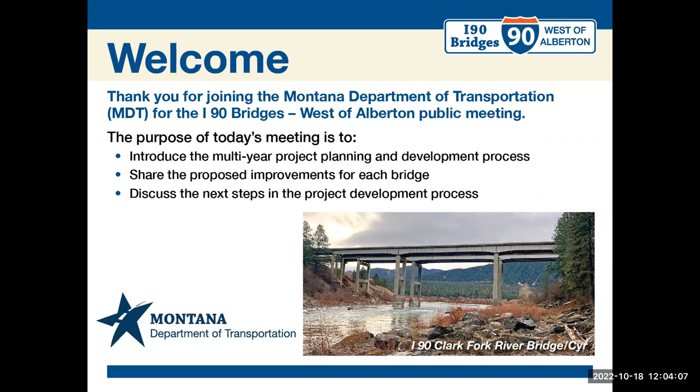At this time, I would like to turn over the microphone to the MDT District Bridge Engineer, Dwayne Wilson. Thank you, Brandon. My name is Dwayne Wilson, and I am responsible for managing the pre-construction activities for many bridge replacement and rehabilitation projects in the Missoula District. MDT's mission is to serve the public by providing a transportation system and services that emphasize quality, safety, cost effectiveness, economic vitality, and sensitivity to the environment.

MDT maintains a staff with the resources and technical expertise needed to perform the workload for the majority of the state transportation projects. When MDT does not have the resources or technical expertise in-house, MDT hires consultants for specific project work. Consultants are an extension of the MDT staff, capable of providing additional skills, experience, expertise, and quality work without increasing in-house staff. They are managed by the MDT consultant design engineer and work together with the MDT project team and management to deliver the project.

At this time, I'm going to ask each of the team members to unmute and introduce themselves, starting with Jason Sen. Hi, I'm Jason Sen. I work in the MDT Consultant Design Bureau, and I'm the project manager on this project. Next is Jim Scholes. Good afternoon, my name is Jim Scholes. I work at Morrison Maierle. I am the project manager on our behalf, and I'm also a bridge engineer.

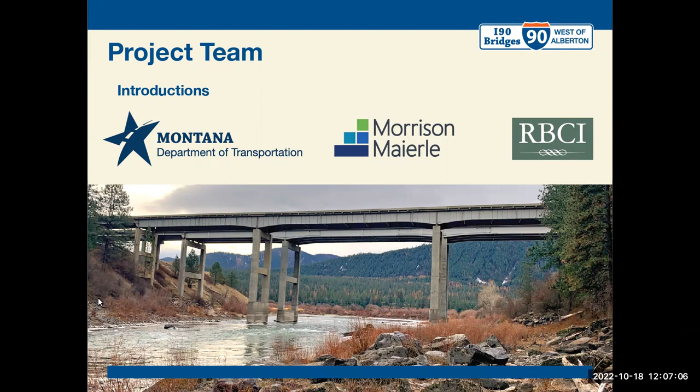The MDT Bridge Bureau is tasked with keeping Montana's bridges safe, resilient, economical, and reliable. The Bureau is organized into two sections: the bridge management section and the bridge design section.

MDT's bridge management section provides condition inspection and load rating evaluation for over 4,500 public bridges in the state. It also evaluates and analyzes overweight permit loads and performs bridge maintenance on state-owned bridges.

MDT's bridge design section provides design and engineering management on bridge replacement, rehabilitation, and preservation projects. It also establishes and maintains design criteria and standards, participates in research projects, and promotes design initiatives to improve bridge performance and value.

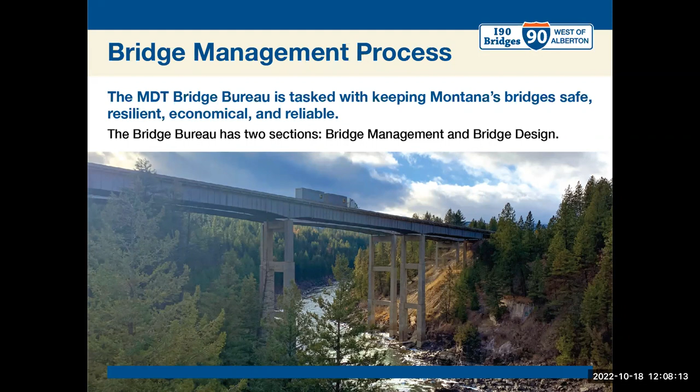Thanks, Dwayne. I'll give you a quick project overview. MDT is improving 3 bridges on the westbound lanes of Interstate 90 west of Alberton in Mineral County.

These bridges carry I-90 traffic over the old Highway 10 at Elizabeth Lane, which is 9.5 miles west of Alberton, and the Clark Fork River near Alberton Gorge, approximately 8.5 miles west of Alberton, and finally the Clark Fork River near the Cyr Bridge, approximately 5 miles west of Alberton.

These bridges were constructed in 1965 and are routinely inspected by the MDT Bridge Bureau. MDT has performed maintenance and repairs on the bridges, but no major improvements have been made since they were built.

MDT is investing in the future of the interstate and has partnered with Morrison Maierle to identify and design the needed improvements. Now I'd like to turn the presentation over to Jim Scholes from Morrison Maierle to tell you more about the project.

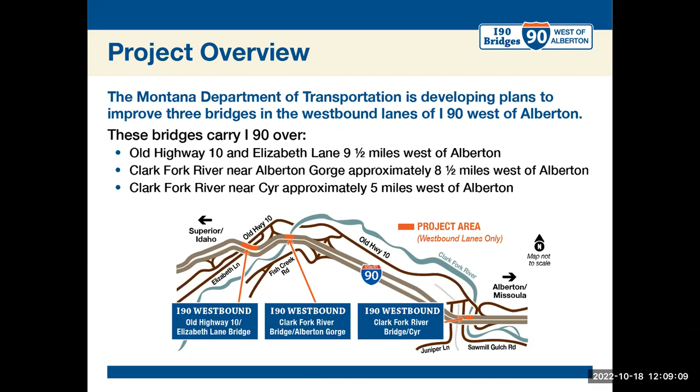Thanks, Jason. I'm going to talk a little bit about the project schedule.

This project is in the design development process, which means we are still several years away from construction. The project team began evaluating the bridges in 2020. This included gathering and analyzing data, performing field studies, including site survey, environmental fieldwork, and preliminary geotechnical investigations.

The information from the evaluation was carefully considered to develop the preliminary improvements that we are presenting today. The next step is to begin developing the final design plans. The final design phase will also include an opportunity for the public to comment prior to finalizing the design.

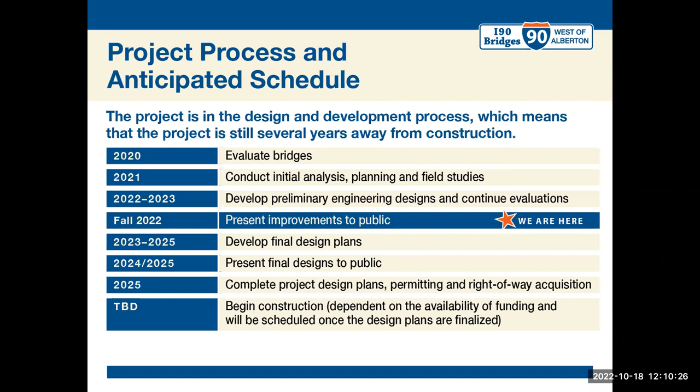Morrison Maierle was tasked with evaluating these 3 structures and developing improvements that are functional, low maintenance, and appropriate for each location. Some of the things we needed to consider in the design include ensuring the continued safe operation of the bridges, developing cost-effective improvements, and matching the interstate configuration with 2 through lanes.

I'm now going to talk about the improvements recommended for each bridge.

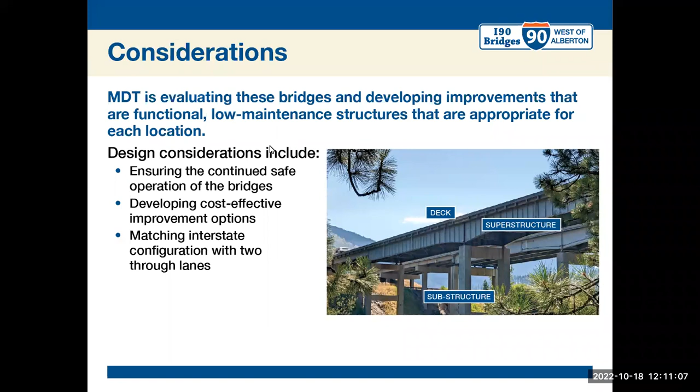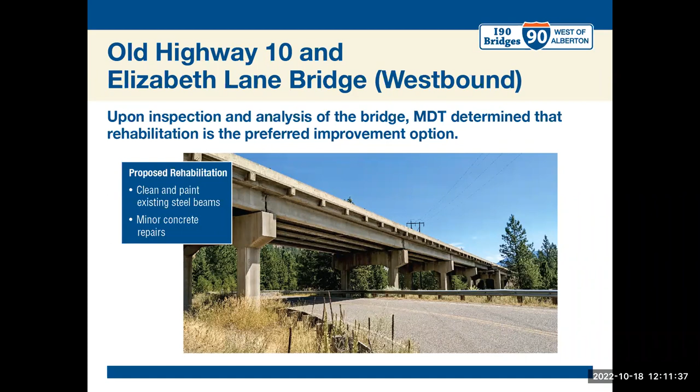At the westbound Old Highway 10 Elizabeth Lane Bridge, we studied various replacement and rehabilitation options. Rehabilitation of the structure was chosen to extend the service life of the structure. The expected rehabilitation work includes minor concrete repair and painting of the girders on the 2 steel spans above Elizabeth Lane. The rehabilitation is expected to extend the useful life of the structure more than 25 years.

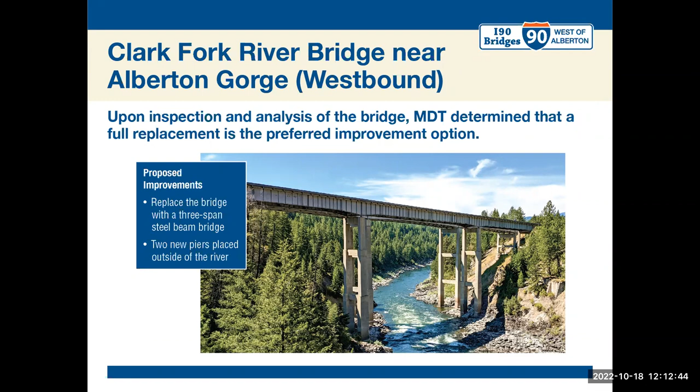The Clark Fork River Bridge near Cyr site is also very challenging with similar challenges to the previous structure, and the same considerations and options were studied. The bridges studied included steel and concrete bridge superstructures in 4 and 5 span configurations.

After considering multiple rehabilitation and replacement options, a new structure was selected as the most appropriate option for this site and structure. The preferred structure is a 4-span steel structure with a longer main span compared to the existing structure. The pier foundations will be located closer to the river banks. Anticipated foundations are drilled shafts at the piers and driven steel piles at the abutments.

With that, I'm going to turn it over to Phil Forbes to talk about the preliminary traffic controls.

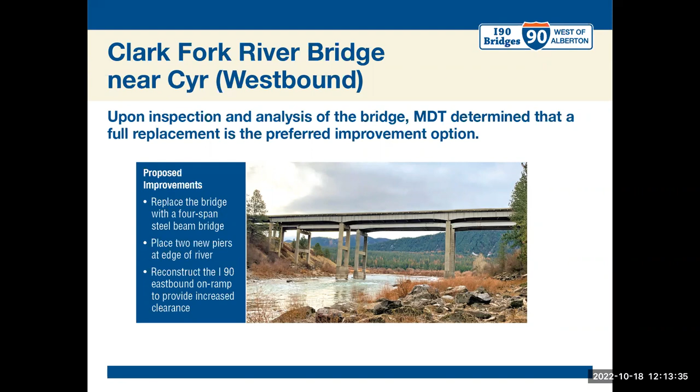Work on the I-90 bridges will require use of standard traffic crossovers where all of I-90 traffic will be on the eastbound lanes at reduced speeds around the bridges during construction.

Making sure that paint removed from the bridge over Elizabeth Lane is contained may require tenting and possibly a short temporary driveway around the overhead work. Overhead work above Sawmill Gulch Road, such as removing the existing bridge and setting beams for the new bridge, will require intermittent closures to protect drivers below.

On the Clark Fork River, we will provide floaters and boaters with advance warning of downstream construction and provide guidance with floating buoys through the sites. Some temporary closures of the river may be prudent. River closures must be approved by the Montana Department of Fish, Wildlife, and Parks.

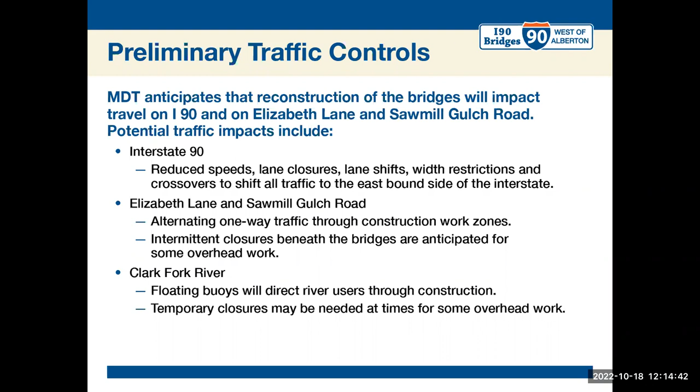In terms of environmental considerations, as part of any federally funded project, in this case funding from FHWA, the Federal Highway Administration, MDT needs to ensure the project is compliant with the National Environmental Policy Act, or NEPA. NEPA requires federal agencies to assess the environmental effects of their proposed actions prior to making decisions. Using the NEPA process, agencies evaluate the environmental and related social and economic effects of their proposed actions, and provide opportunities for public review and comment on those evaluations.

These bridges are being reviewed under NEPA, which includes the requirements of a few other important federal acts. For this project, MDT had Morrison Maierle and its subconsultants conduct a site investigation of the bridge sites for biological resources. In consideration of the Endangered Species Act, bull trout, grizzly bear, and lynx were identified as having potential to be impacted by this project.

Our project team has already coordinated with the U.S. Fish and Wildlife Service to identify conservation measures to be taken to avoid and/or minimize impacts during construction. For example, in-water work will be limited, we'll increase the bridge spans as much as possible to keep piers out of the water, as Jim described earlier, and the contractor will minimize noises transmitted through the water.

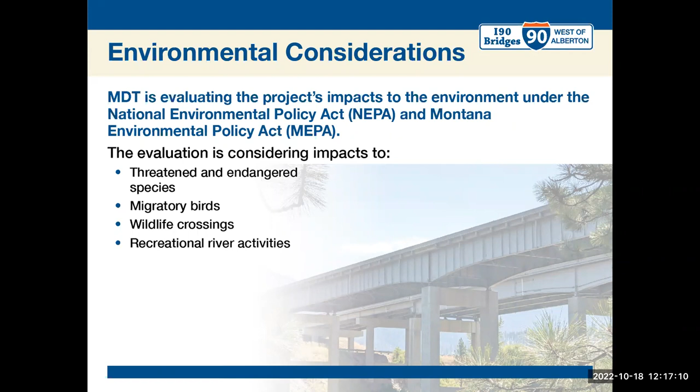Thanks, Phil. So as we discussed earlier in the presentation, we're currently in the early design phases of the project. Following these public meetings, the project team will review input from the public, analyze additional technical and environmental data, and refine the design improvements, and then begin the process for acquiring any right-of-way that may be needed for construction.

The current schedule suggests that the final design plans will be presented to the public sometime in late 2024 or early 2025. Construction on these bridges is dependent on available funding and will be scheduled once the design plans are finalized. Now I'll turn it back over to Brandon to close out the presentation and let you know how you can stay informed about the project.